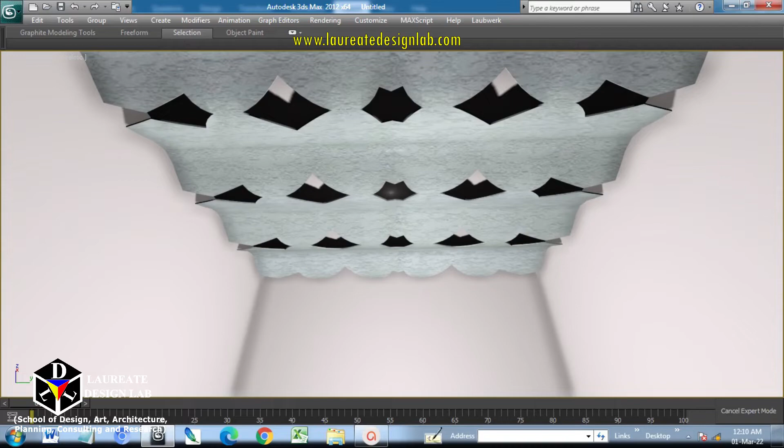Now we will look at the drawing or the 3D sketch to understand the false ceiling. This is two-level false ceiling system in which the structural component such as this C channel and the furring channel, this is another structural component, they are tied together and hanged. So this is the hanging system and this is the grid system.

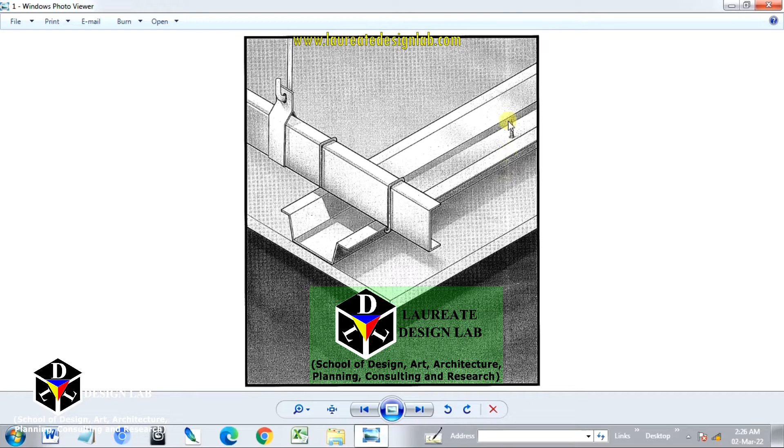This grid system is receiving gypsum sheet through the screw which you can see here. Now look at this whole false ceiling. Furring channels are repeated at certain distance. This distance is 450 mm, and further these C channels are arranged again on certain distance.

This distance is around 900, and the size of the sheet or plasterboard or gypsum board comes in 8 feet by 4 feet dimension with the thickness of 12 mm or 12.5 mm. So this is level 2 false ceiling, in which you have the finishing material down below, and then you have framework, and these frameworks are hanged by this hanger.

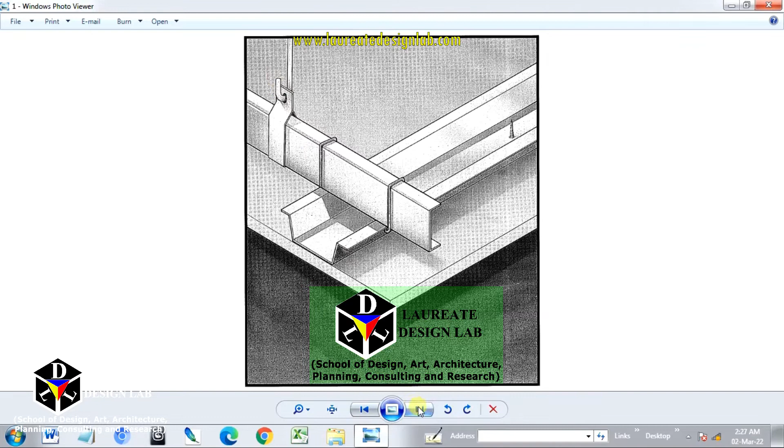And this hanger can be strap or threaded rod, or it can also use this furring channel or the angle, or it can at times use this C channel. So the whole system comes like this. Furring channels are tied to the C channels through this clip, and the whole system, which is shown here, the framework and the sheathing material, to the hangers.

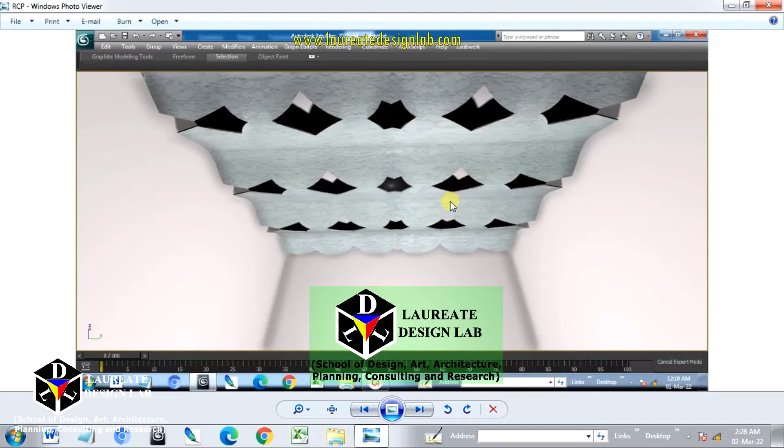Now these hangers are further connected to the cleat angle, and this cleat angle goes to the soffit of the structural slab. So just we made false ceiling in curvilinear shape in software. So the software skills gives you the design visualization. After the visualization of the design, now you will have to think of the construction, and the construction depends on the kind of sheathing material you want.

So the false ceiling could be level 1, in which the grid system or the framework is of just one level. Means the way we see here, furring channels and then the C channels. Look at it here. This is what is not required if it is level 1.

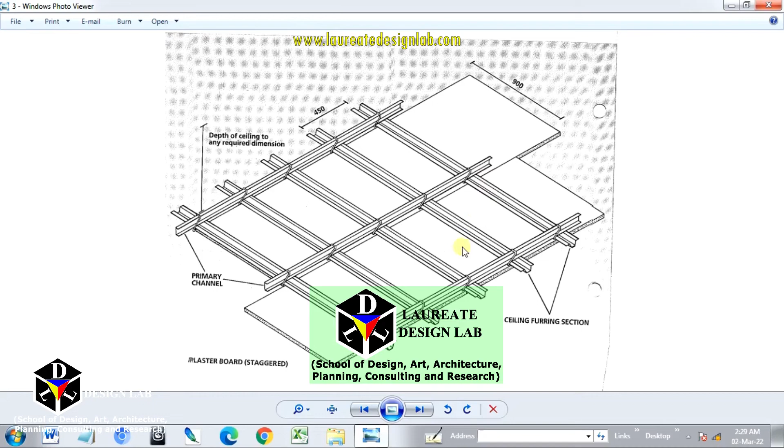In level 2, you need to have 2 levels, the furring channels, then the C channels. Look at it. First comes the furring channels and then the C channels, and these both are making grid, and this grid structure hanged by the hanger.

So it could be level 3 also, in which the structural system consists of 3 levels. Level 1, the way it is shown here, the furring channel. Level 2, C channel. Level 3, something else. It depends on the kinds of ceiling or the manufacturer of the ceiling, how they design, how they give the manual to fix it.

Now you can relate the design which you are doing in the software with the construction of the ceiling. The knowledge of both the items is required to actualize your design.